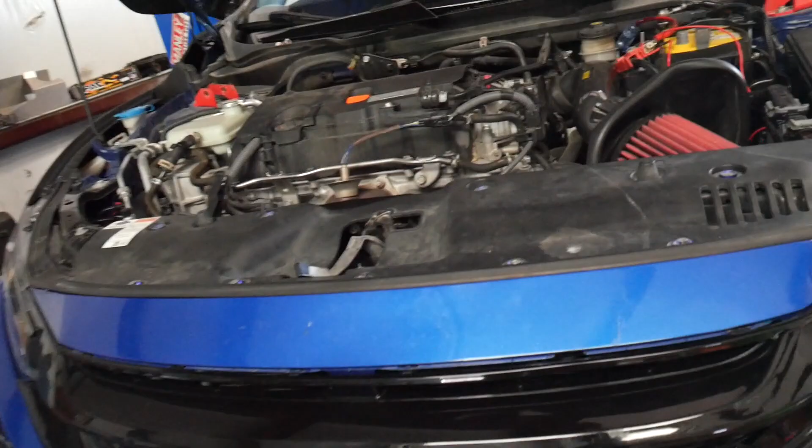So this 2020 5.7 that we just finished up is going out on a test drive, and it's going back to its owner this morning. We are wrapping up things on the Civic, got the new alternator put on it, and the last thing we got going on underneath it is some lights. We had a couple of vehicles drop off this morning, had a 2020 Mustang GT, a black one, come in. It's getting some exterior modifications. You guys will see that car soon.

Let's get after it. So guys, I went ahead and pulled in our 2020 Mustang that we're about to do a bunch of exterior stuff to. I'll do a quick walk around of the car, show you what it looks like when it's all wrapped up. So to show you real quick, got the fog lamps in, those light up blue, those look pretty cool.

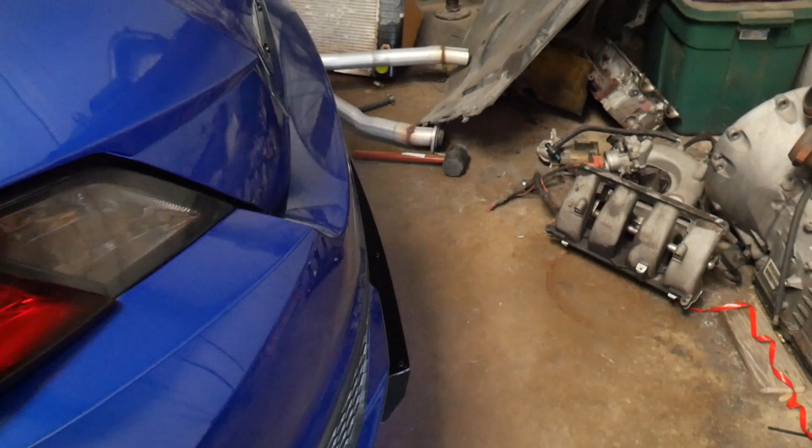So all that turned out great. This one is wrapped up. We're gonna pull this out and get it on back to the customer.

Alright guys, so we got our 2020 wrapped up. John's about to fire it up and pull it forward. Now I'll give you a little walk around of what all we did, and I'll point it out as we get to it.

As you can see, we got our front splitter all wrapped up, we've got our side louvers, back louver, little side pieces, third brake light with the reverse light. And that's it, this Mustang is all wrapped up.

Sorry guys, I did not film. Yesterday was crazy, I did not film the Mustang that you see me do the 19 intake manifold swap on. We tuned that car a while back, changed the manifold. I did make a couple of pulls on the dyno, just checking things over, made a few tuning changes. We ended up picking up some more power with that intake. I think that car finished out at 469 horsepower. I don't remember the torque.

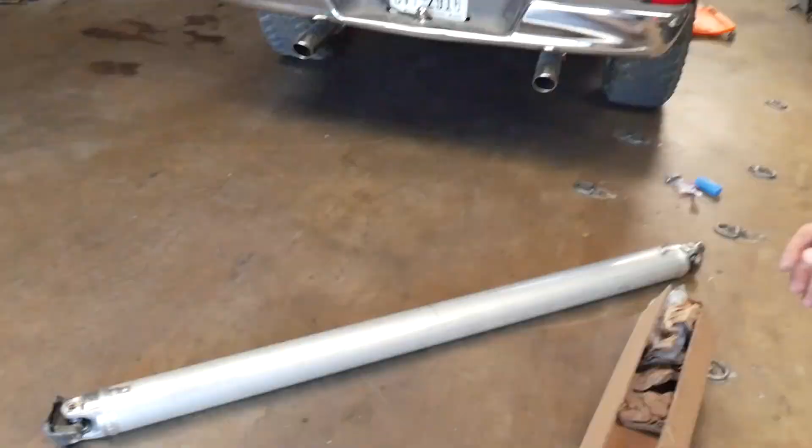As we keep moving forward with some of our projects, our LS Swap Ram is back in the shop. It's a little bit before lunch, so it's not quite the afternoon yet, but our custom drive shaft has arrived. This is a 5-inch aluminum, Dodge on the back end, LS on the front end. And here's where we ordered the shaft from, Action Machine. Here's all their contact info if you guys need any custom drive shafts made.

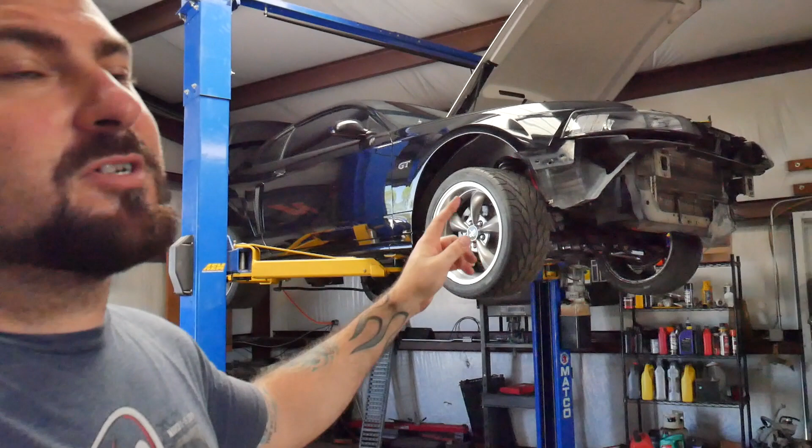We've got some new ones in the shop this week, some interesting ones. This one just got dropped off. Don't know what year it is, but it's a 3V body style Mustang getting a Coyote swap. The motor and trans are in, and we're going to finish everything else up on this thing - coolant system, fuel system, get it running and driving. Should be a pretty quick car with the Coyote engine in it.

Aside from that, LJ's truck is back from ATS Diesel with the new trans in it, and we are chasing some gremlins. The trans temp sensor wasn't working. Bought a new sensor, wired it up, and the trans temp is now working.

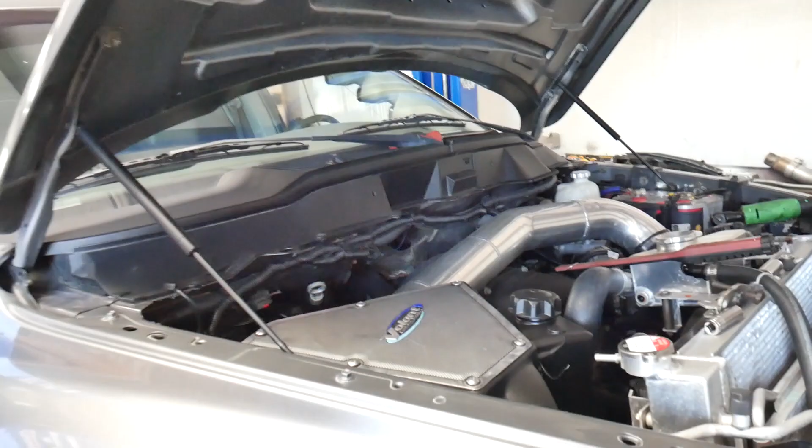As you see, this one's an oddball too. We actually built this car before we started doing this truck, before I started doing YouTube really. This is an 03 Dodge Ram 1500 that we have since swapped in a 6.1 that's been stroked out, bored out to a 6.4 liter Hemi with a Whipple supercharger. Really cool swap we did many years ago.

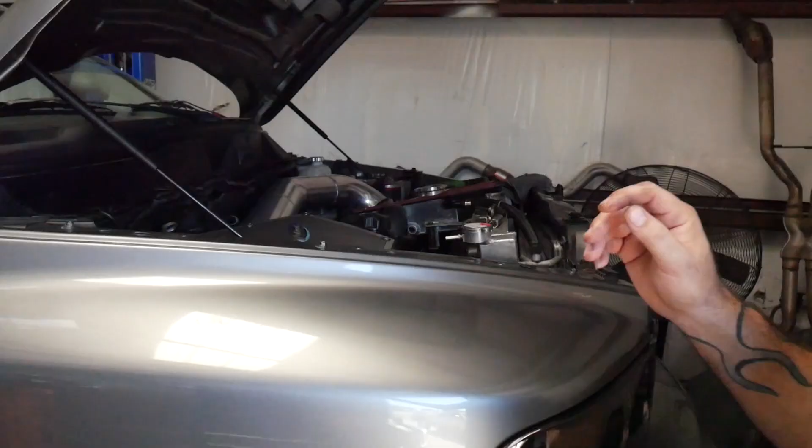As you can see, custom intake, heat exchanger setup, it's got gauges. Cool little truck. Can't figure out exactly which one.

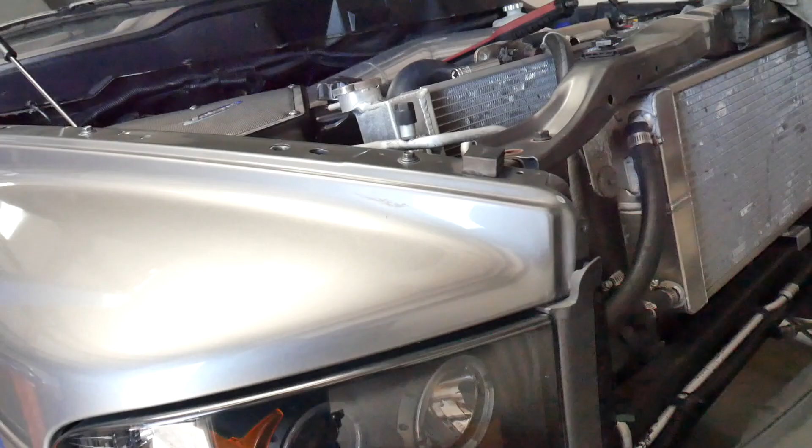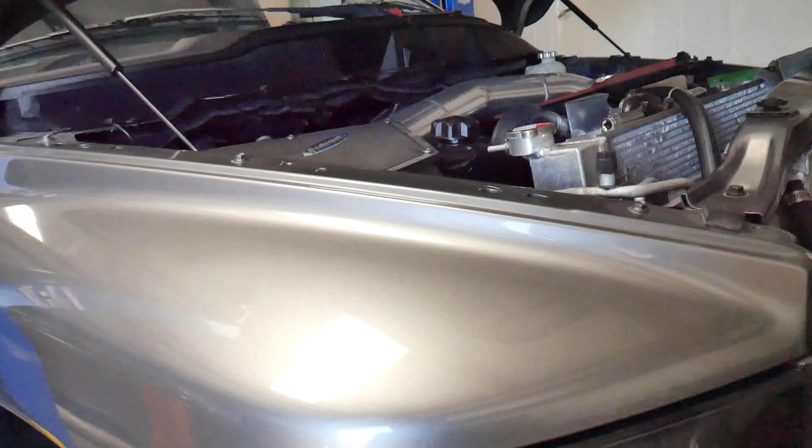We changed the main GT500 tensioner - yes, there's a GT500 tensioner on this Hemi. We changed it out just because it was getting weak, it had been on there for a very long time. We thought that was maybe the issue, but it wasn't. So we've got the two upper idler pulleys off the supercharger, just going through and checking what pulleys feel grindy, because there's not one that's super obvious. We'll put a new belt on it, put some new pulleys on it, and that should cure the issue.

But anyways, the truck's been gone for a while. It's been at ATS Diesel because Clint over there does a phenomenal job. ATS does a great job with their diesel transmissions, and they stand behind their warranty. So they ended up picking this truck up, taking it up to their shop in Colorado, and they didn't quit until they got a trans that would live in this thing.

As far as power, I can't remember what it makes exactly. I want to say last time it was on the dyno, it made like 640 horsepower or something like that. So it's very stout for an 03 Ram - the stock tranny would not live at all. We got a few things to address on this thing, and then maybe it might hit the dyno again. But I hope you guys will enjoy this, because it's one that you don't see often.

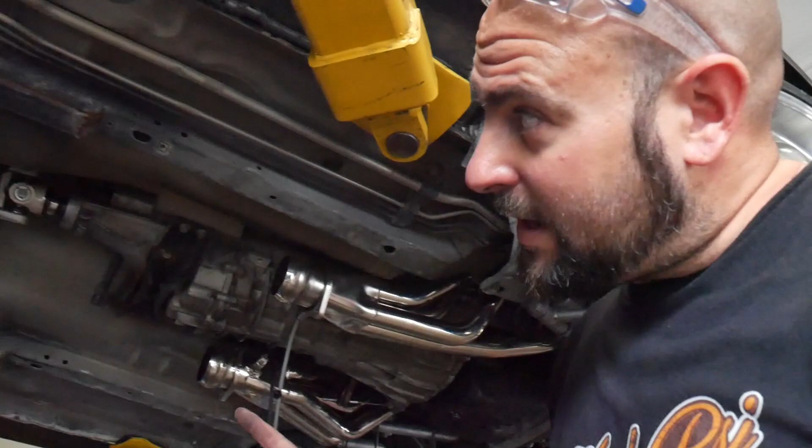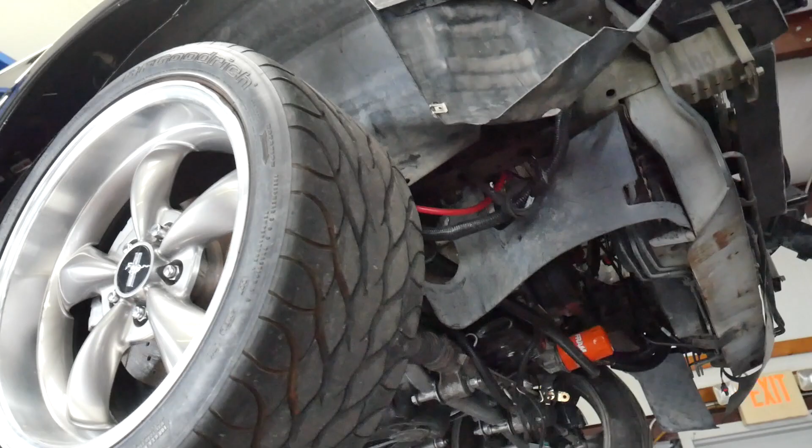As we move along with our Coyote and our 3-valve project, we've got our drive shaft in, starting to get our O2 sensors in. We're just going through, tidying and fixing stuff. We've also got our belts on our engine now, and we are currently working out the coolant system. Once we get the coolant system ironed out, we'll work on our control pack and start tidying up our vacuum lines, focus on our fuel system - we have a tank over there with an upgraded fuel pump in it. We got to put a return line and a rising rate fuel pressure regulator. Then once those things are on, we'll go ahead and focus on trying to get this thing to fire up for the first time.

In the meantime, got the 2014 Corvette that we did the camshaft in - it needs an AC compressor, so it is tore apart. John's got the AC compressor out, and unfortunately our local GM dealership dropped the ball on ordering our AC compressor, so now it's stuck on the lift for another day while we wait for a pump.

Moving right along with our week, as you can see, we got LJ's truck on the dyno. We are trying to get through some issues, so we got all the sensors working and some other things with the vehicle. Figured out some of the AC stuff because it was custom - it never got finished when this project was built. We got the AC working now too.

Took it out for a test drive and we had some transmission codes pop up, and the air fuels didn't look too hot. Looked a little lean. So we went ahead and put this thing on the dyno.

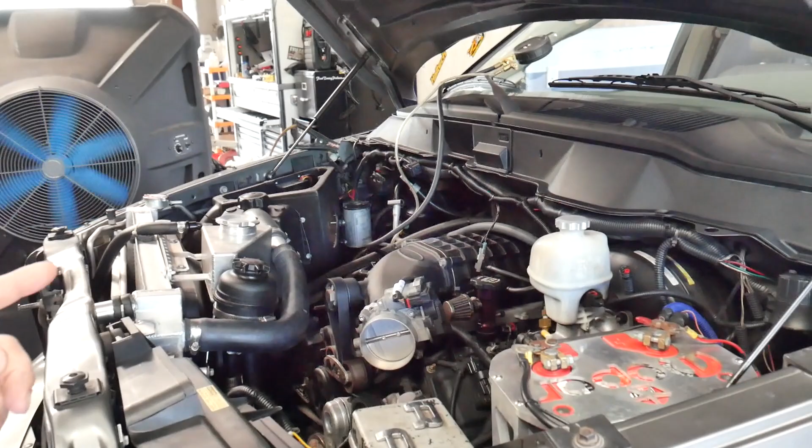I'm going to plug the computer in, we're going to do some diagnostics on the dyno. As you can see, I've got a fuel pressure gauge on the motor. So we'll go ahead and fire this thing up and toy around with it on the dyno here a little bit and see what's going on with the fuel pressure.

So guys, as you just seen, we made some pulls on the truck, and unfortunately we are dumping fuel pressure. At an idle it's staying at 60, and then when you romp on it, it's dropping all the way down to 38. So losing fuel pressure, definitely have a fuel delivery issue.

So we're gonna look at a couple viable options, discuss them with LJ, and then we'll bring it back on the rolls and see what kind of power it makes with the fuel issue resolved.

What's up HPP fam? As we wrap up this week on a Friday, we've got a cool one. I'm picking up the camera late in the afternoon. We've been doing some spring cleaning in the shop, which is great, even though it's summertime - I guess we're in the middle of summer. But anyways, this thing's pretty cool. I want to say a 1966 Chevrolet C10. It's got a 5.3, supposedly it's built.

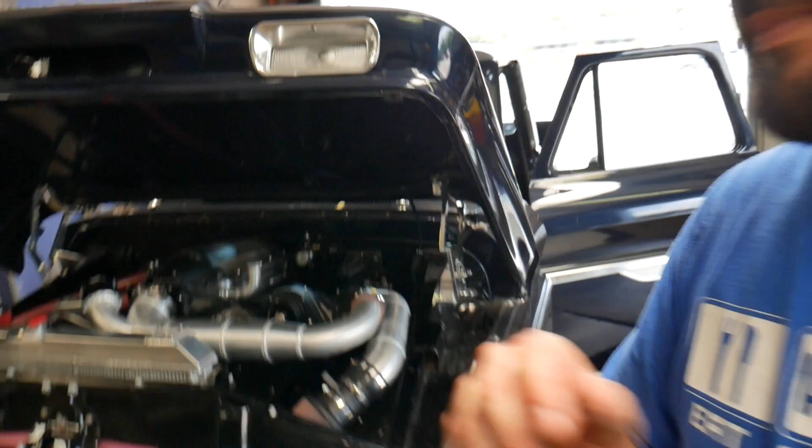Got a small camshaft, got some headers on it, got a ProCharger P1SC, got a Holley Hi-Ram with an intercooler brick in it. So I'll walk you guys around this thing real quick, show you the setup. Just got it running on speed density, we're on a 2-bar. We'll find out here shortly how many pounds of boost this thing will make with the pulley setup, and get this thing tuned out.

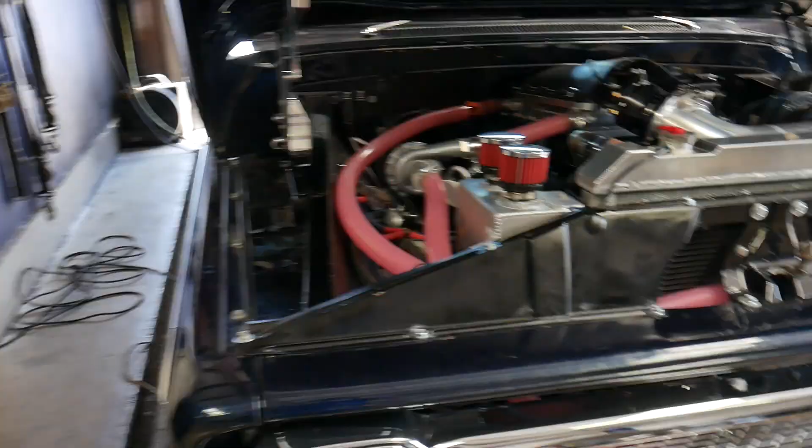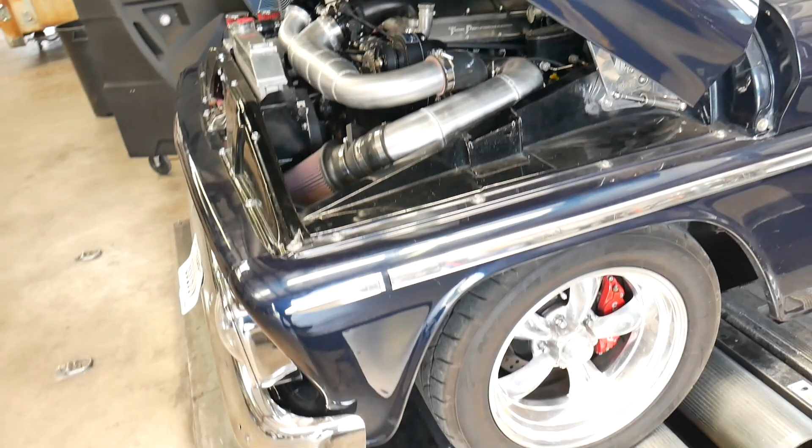Pretty sweet little truck.

So now I got this thing running and idling, we'll go ahead and strap it down and get down to business. So guys, we got our first tug off on our C10. Unfortunately, I did not turn the camera on. I had to pull the spark plugs on this thing and gap them down. Unfortunately, we found one spark plug that had a small hairline crack in it, so we got that one replaced and fired it up, and I wanted to make a pull just so I could see if it pulled clean, and it did.

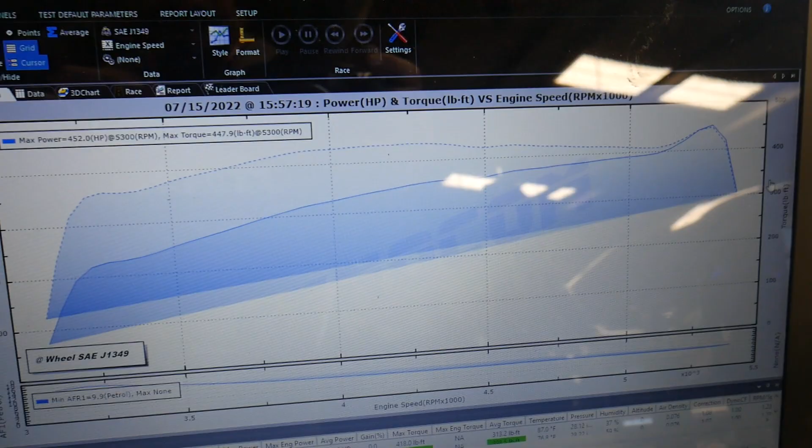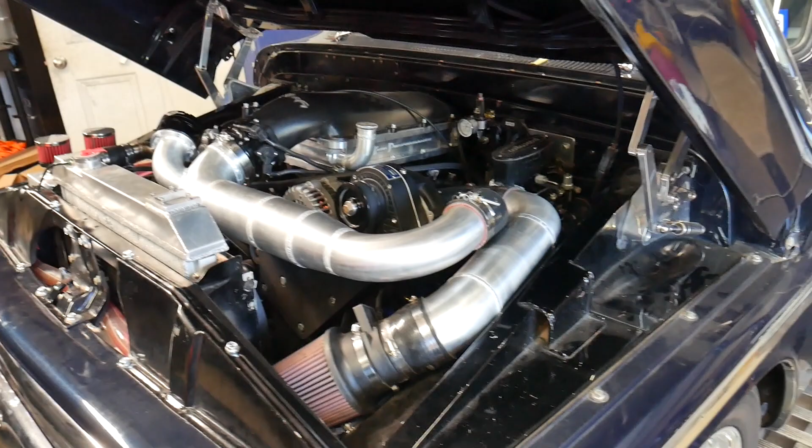So this is what we're starting with - I gotta look through the log and see how many pounds of boost that was, but 452 horsepower and 447 torque is what we are starting with on this thing. Super fat air fuel, 10.0. So let's go into the computer, start dialing in some changes, and I'll be sure to get this next pull for you guys.

So that was another clean tug. Picked up about 50 horsepower there between runs. That one's 502. It looks like we're spinning because it's catching up top here.

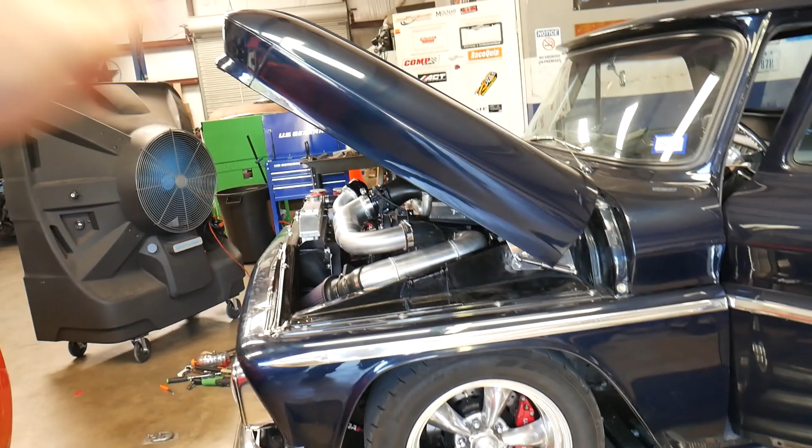So I may cut this session short. I am here on a Saturday, and that's because I wanted to get those plugs done and I wanted to make a clean run. Truck didn't get on the dyno until late in the afternoon, and the customer lives 4 hours away, and they're coming on Monday to pick it up. So I didn't want to fall behind if we ran into any other issues with the truck - I wanted to make sure I could get them resolved beforehand. But that's good, 50 horse between runs, I'll take that.

I might try to put a little sticky on the tire, try to pull it back a little bit more. It is a truck, no weight on the rear end, so we'll see about doing that. But let me look through the file here, the run that we just made, make some more changes, load them up, and we'll make one more run before we go today.

She was making some stink that time. About 14 and a half degrees of timing, 7 pounds of boost.

Ooh, we getting there baby. I think we're pretty close too, but 634 horsepower, 570 foot-pounds of torque. This little pickup's gonna do some burnouts, let me tell you.

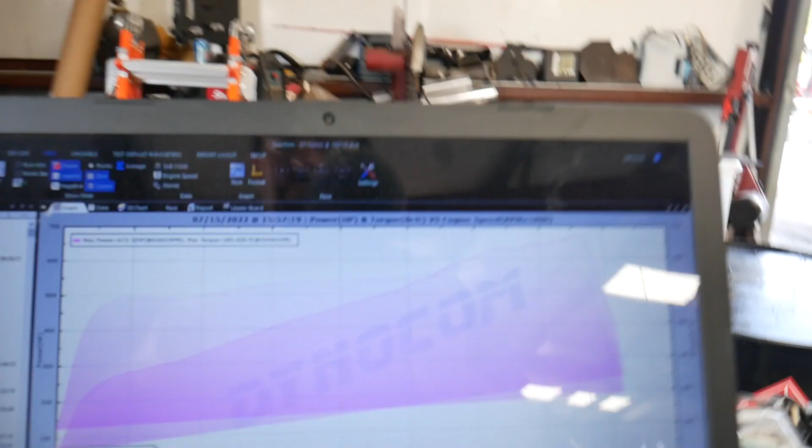So guys, that's going to be the last pull on this joker. Let me show you where it ended up at: 673 horsepower, 585 foot-pounds of torque. She's a mean mamma jamma.

So I'm going to rip this thing out the dyno, take it for a drive.